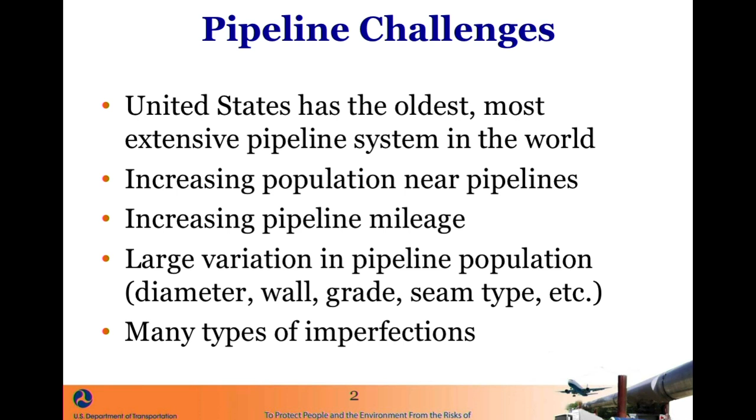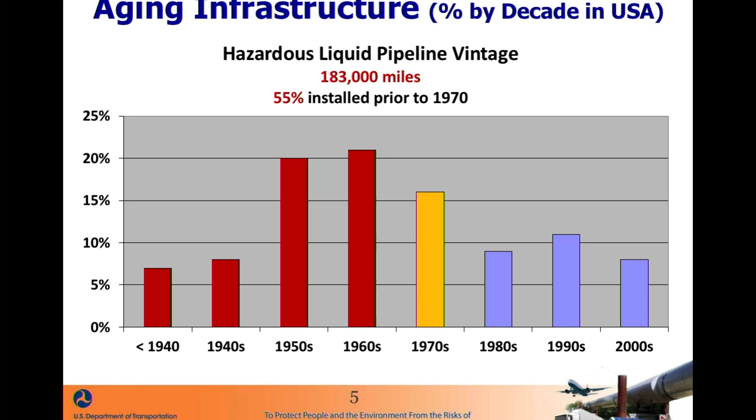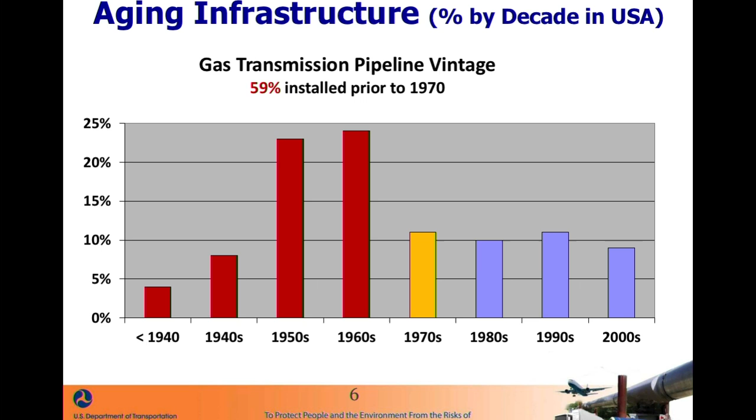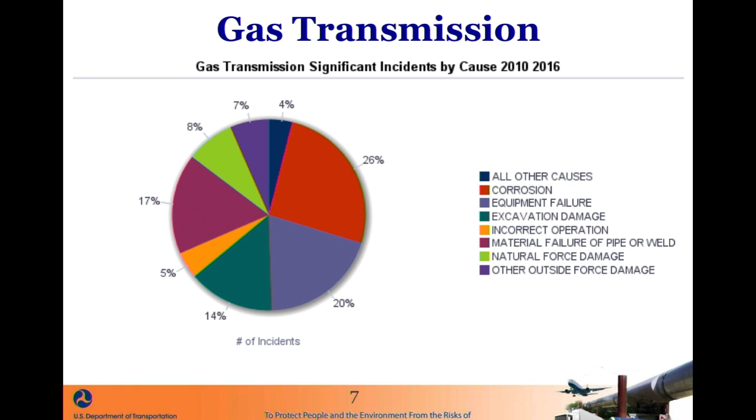And failures may have many causes. This is a pie chart that shows gas transmission significant incident failures. And you can see there's a lot of colors on this pie, and that corresponds to a lot of different types of imperfections that are in the pipe. And similar for hazardous liquid. There are many different causes of hazardous liquid significant incidents here.

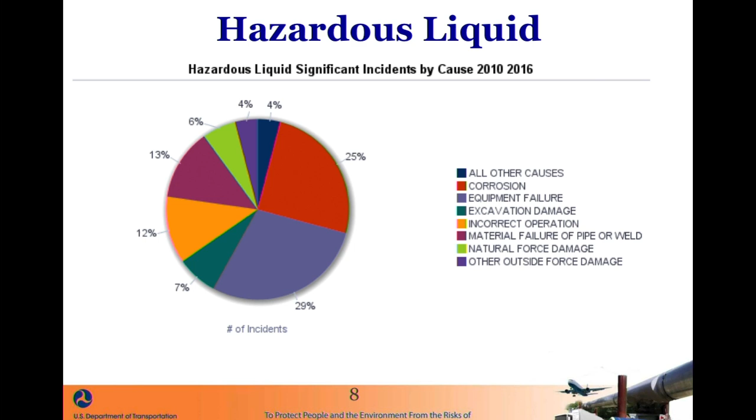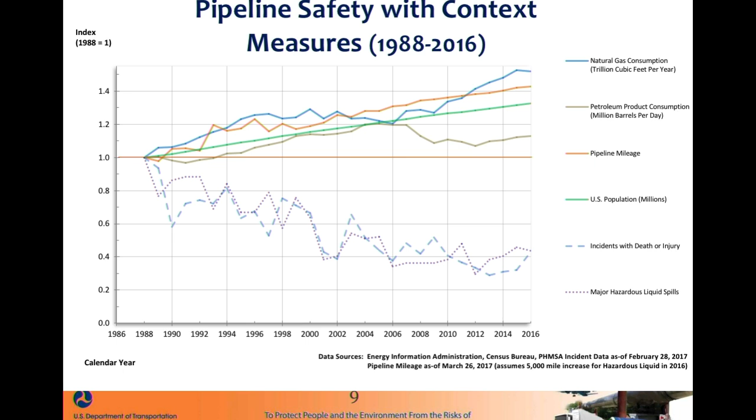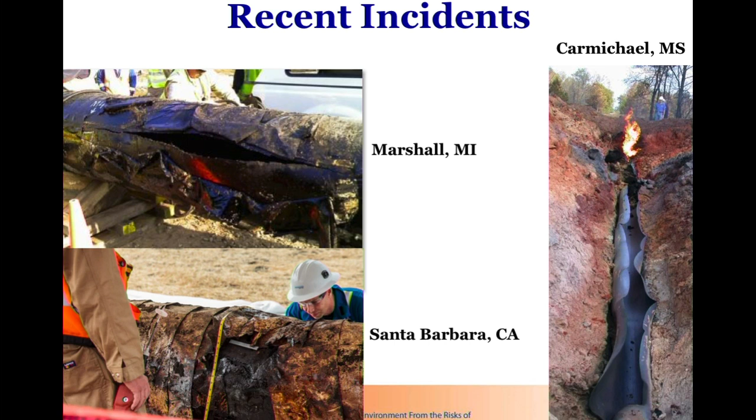This chart shows that the trend on the top shows pipeline miles increasing, but we see a decreasing trend in pipeline incidents. And we think that's mainly due to integrity management, and ILI is a big part of that, trying to find these defects and make repairs before they fail. And so this we feel is a good metric to illustrate. But as Carl says, there have been some high-profile incidents where ILI missed the defect which failed, including Marshall, Michigan, Santa Barbara, and Carmichael, Mississippi.

So in 2007, a propane pipeline failed in Carmichael, Mississippi, where 2 people died, and I've took an excerpt from the NTSB report there, where it says, current inspection and testing programs were not reliable to identify features associated with the long seam ERW failure.

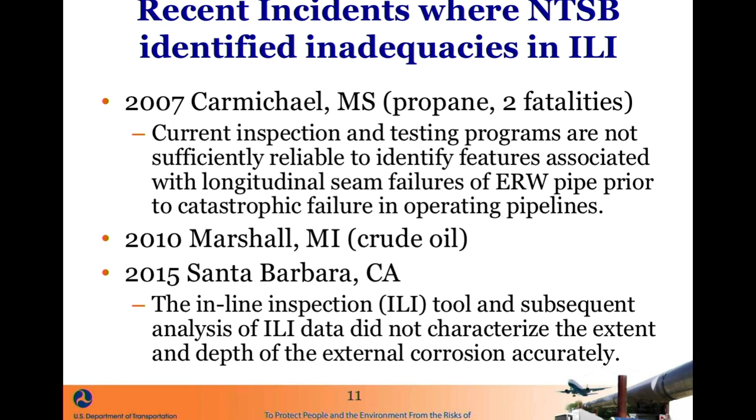So there's also the 2010 Marshall, Michigan, which made significant national news with a significant crude oil spill, and the 2015 Santa Barbara oil spill, where the NTSB says ILI and subsequent analysis of ILI data did not characterize the extent and depth of the external corrosion accurately. So clearly, there's some issues which have been identified with ILI.

And in the 2007 Carmichael report that NTSB wrote, they issued a recommendation to PHMSA. They recommended that we do a study, and that study shall include an assessment of the effectiveness and effects of inline inspection tools, as it applies to electric resistance welded pipe, which is a common type of line pipe which is out there. And this particularly applies to low-frequency ERW pipe made before 1970, which is more suspect to welding seam issues. And so we conducted this study.

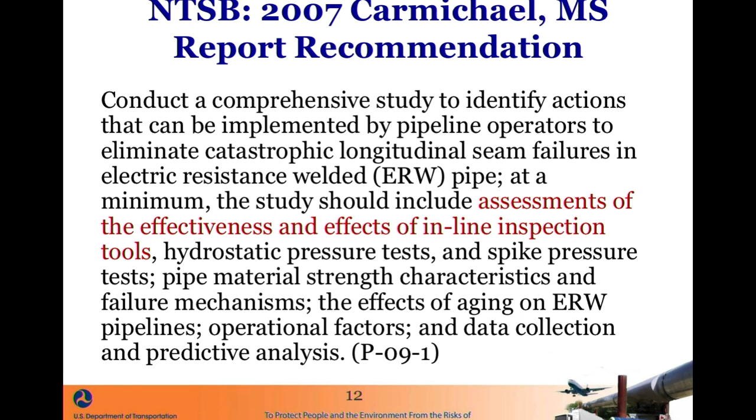It's a 2012 report by Kiefner and Associates and Det Norske Veritas, and it identified significant weaknesses in inline inspection tools, including unreliable defect sizing, accuracy, missed defects, inconsistent failure stress calculations, and that more rigorous verification of tool performance is needed.

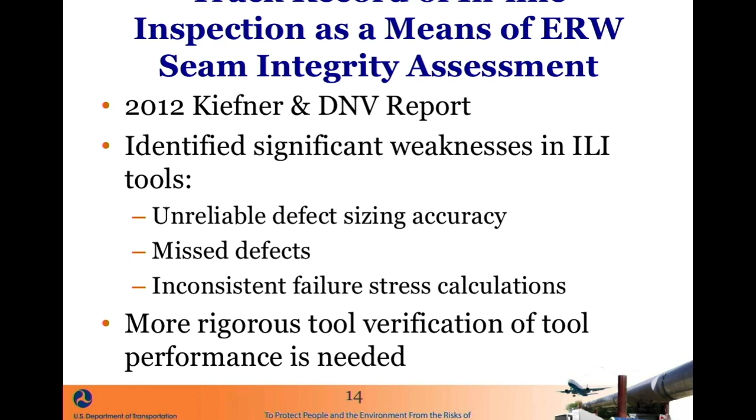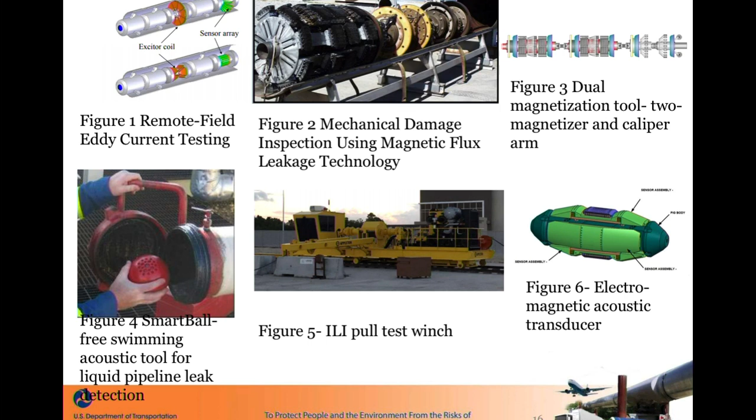And so here are some of the projects that apply to ILI tools. This includes eddy current technologies, magnetic flux tools, EMAT tools, and also an ILI test facility to try to have a standardized method of testing these ILI tools. We feel that's much needed in the industry to try to advance the technologies and to help the industry get better.

So as far as PHMSA regulations, we have comprehensive integrity management regulations, and ILI is an important part of that. And it's in our Part 192 natural gas pipeline code in Subpart O, and under the hazardous liquid code is in 195.452 under integrity management. And our regulations say that you must follow ASME B31.8S for selecting the appropriate tool for the covered segment.

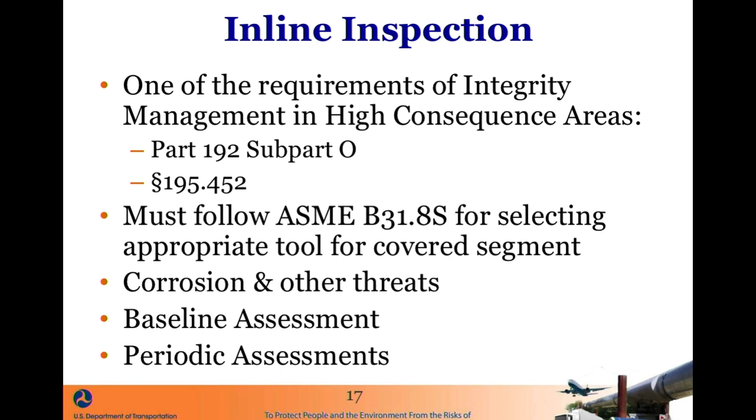These ILI tools are generally used to find corrosion threats and other threats. And they're used to develop your baseline assessment, and then you have to run periodic assessments to see if the defects have grown over time. So, we recognize that no tool is perfect. Each one of these ILI tools is designed to detect a specific imperfection type within a certain size and orientation.

So all these tools, they're not perfect. They will not find every defect that's in the pipe. They don't have 100% accuracy. There's a tolerance associated with every tool, and that has been getting better over the years as the technology improves. And also keep in mind, this is an indirect assessment method.

I think of it as looking at if you see a shadow of a duck, it's probably a duck, but it could be something else. It could be another animal hiding behind the duck. You don't know. So you need to do periodic digs for direct assessments to validate the results. You're looking at shadows. Was it really a duck?

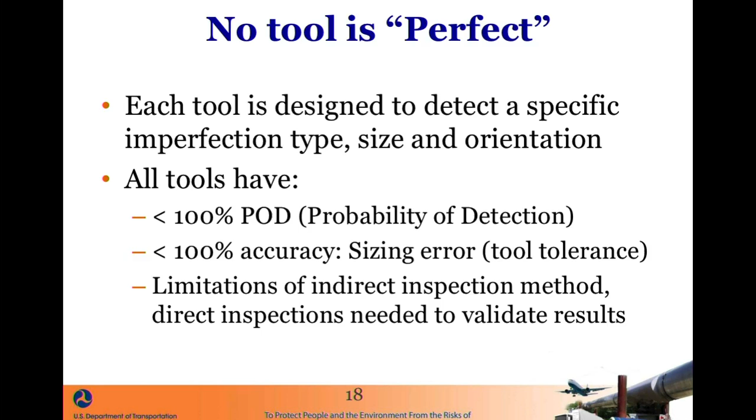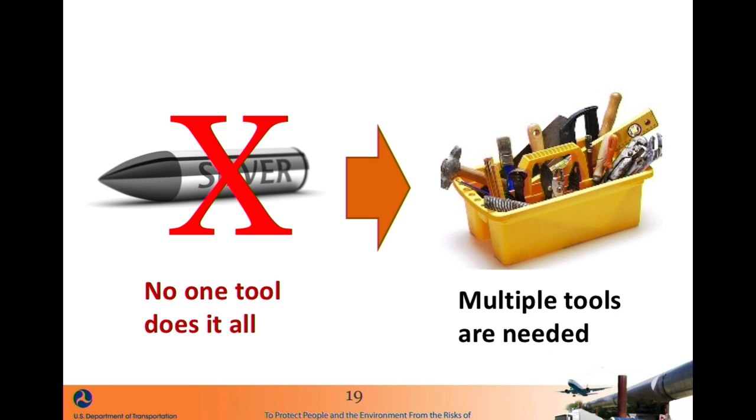So I think one tool does not do it all. It's not a silver bullet, but this should be used as one of the many tools in your integrity management toolbox to safely manage your pipeline. Another way to think of it is that the ILI tool is one layer of defense. You need to have many other layers to assess. Every tool has its strengths and weaknesses, and you need to use complementary tools to see things that that tool may not see.

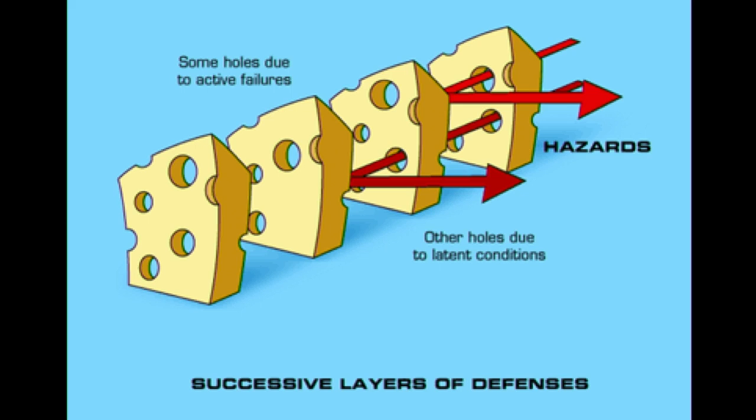So in summary, ILI is an important part of an effective integrity management program. You're much better off running ILI than not. You're much better off getting more information than less information about your pipeline system. It's a very valuable tool. It has seen a lot of improvement over the last few years, and I think everyone feels that it still needs a lot more improvement.

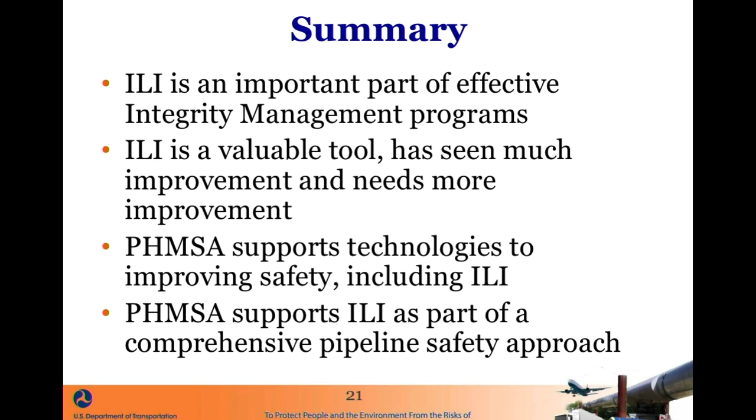We support new technologies to improve pipeline safety, including ILI, and this is illustrated by our strong research program. And like I said, we support ILI as a part of a comprehensive pipeline safety approach. So I don't know if that answers your question, Carl, or smart pig smart enough, but this helps discuss that issue. Probe that at the end.

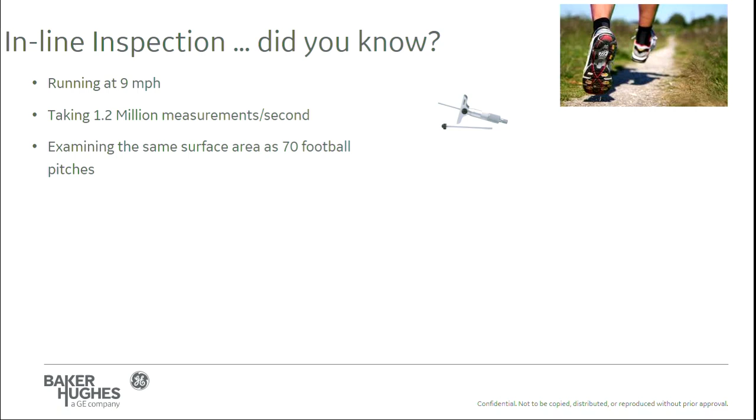It's taking measurements at 9 miles an hour. It's taking 1.2 million measurements a second. That's equivalent to 70 football fields of data being collected at each run. And 100,000 on 20,000 analysis screens. And finding a defect that's the size of a quarter.

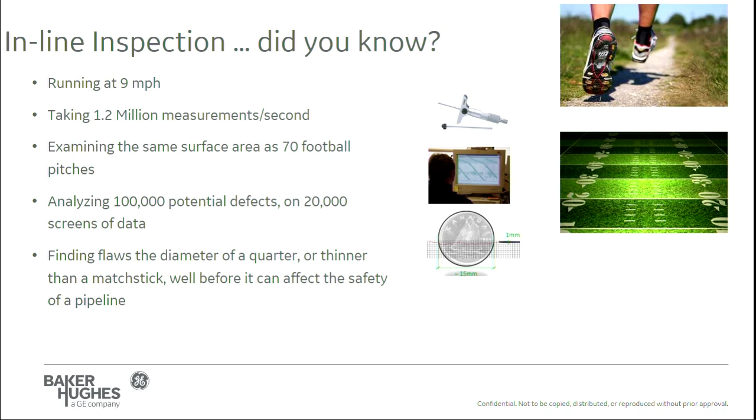And the analogy I like to use is that of a medical imaging tool. Because what you're doing with an inline inspection is exactly what you do when you have your annual or biannual medical to make sure that you're okay. And if you find that you have an issue, then you go for repeated checkups and repeated images to see if that illness has grown.

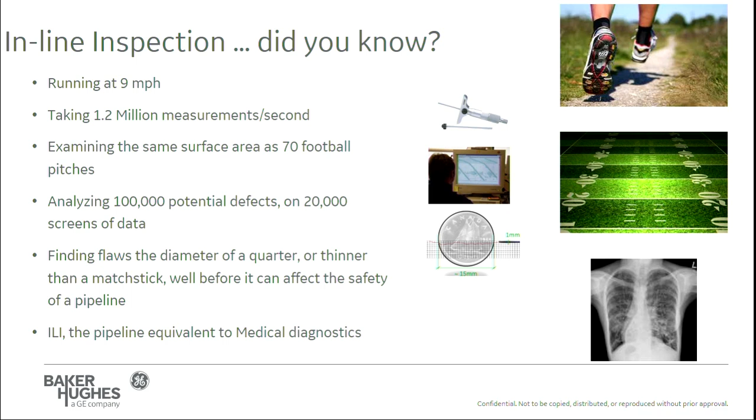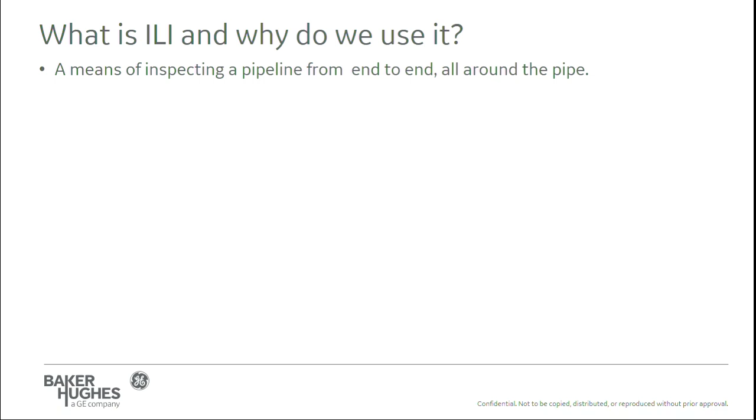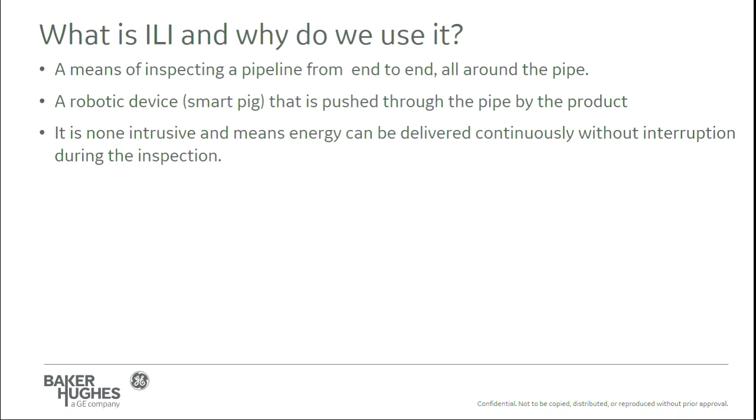So, why do we use inline inspection? It gets all those measurements done from end to end of the complete pipeline, not just a small part of it. It's a robotic device, which unfortunately is called PIGS, that's pushed down the pipeline by the product itself. So it's totally unintrusive. It doesn't affect the flow of the energy. The pipeline still works while it's being measured.

It can identify small flaws way before they become a big threat to the pipeline. Therefore, by repeat inspections, you can actually measure the rate of the flaw growth and therefore plan your maintenance accordingly. It's the most comprehensive means of measuring the pipeline today. It's not perfect, but it is the most comprehensive.

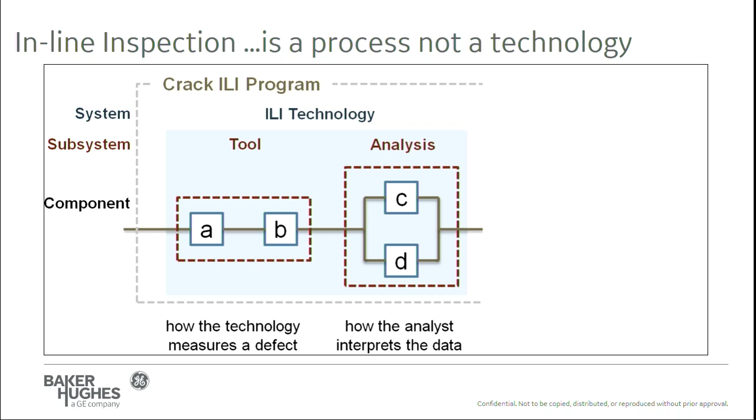So if you look at the system, the crack tool has A and B. A might be a piece of technology, B might be a piece of technology, or it may be a piece of equipment. Analysis: C could be an algorithm, D could be a trained analyst using that algorithm. And then we hand it over to the operators, and they have the pipeline integrity management engineers and the maintenance and repair people who select the digs and do the remedial work. I'm not going to talk about that because Dave Chittick from TransCanada is going to do that for us. So I'm just going to concentrate on the first bit.

And to do that, I thought I would show a small video of a typical MFL tool, just so people understand what a pig does when it's in a pipeline.

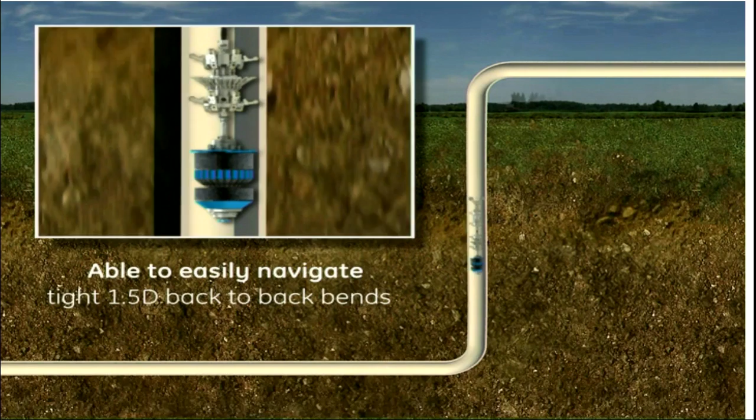These things you see that look like torpedo tubes in a submarine, these are launch and receive traps. This is how we get the pig into the pipeline. The pig has to be flexible. Number 1 rule, never get the pig stuck in the pipeline. Number 2 rule, make sure you get good data.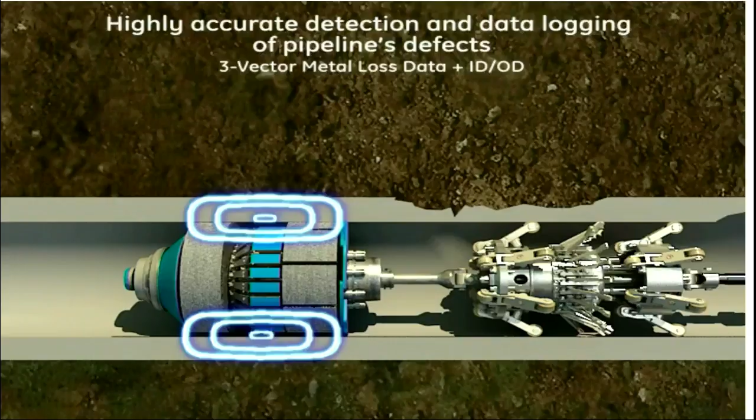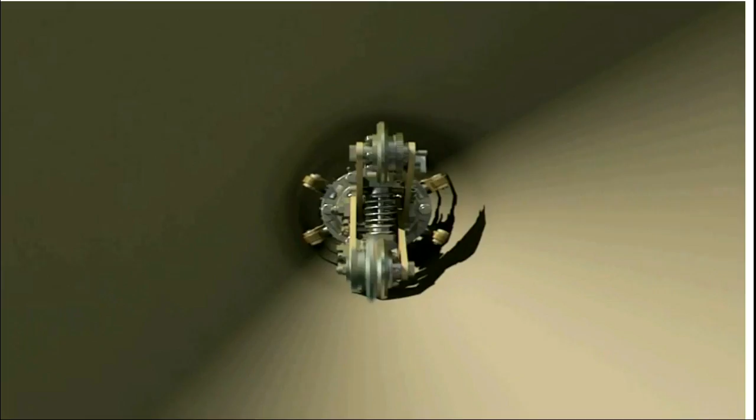So this particular pig uses magnetic flux. You see the blue circuit there going through the pipe. The sensors, the blue sensors in the center, are picking up metal loss and recording it on the tool. On the second module, we can see in the center some caliper fingers, which are actually taking the profile of any dents. The wheels on the back, they tell us where the pig is and how fast it's going, so that we can use it for location later.

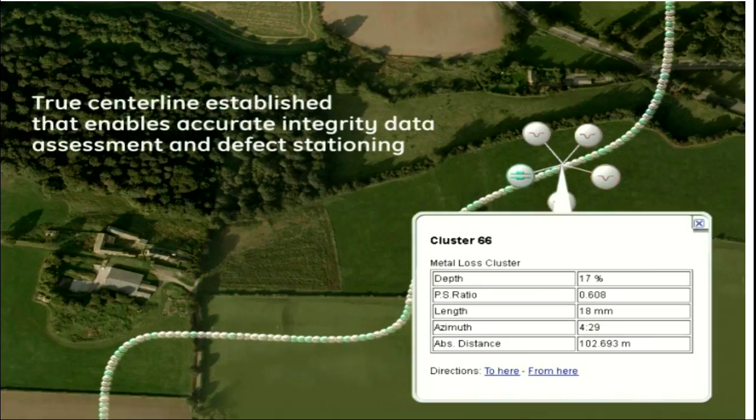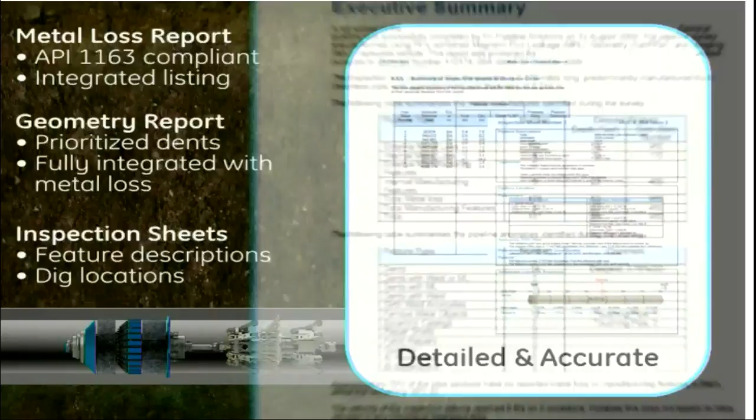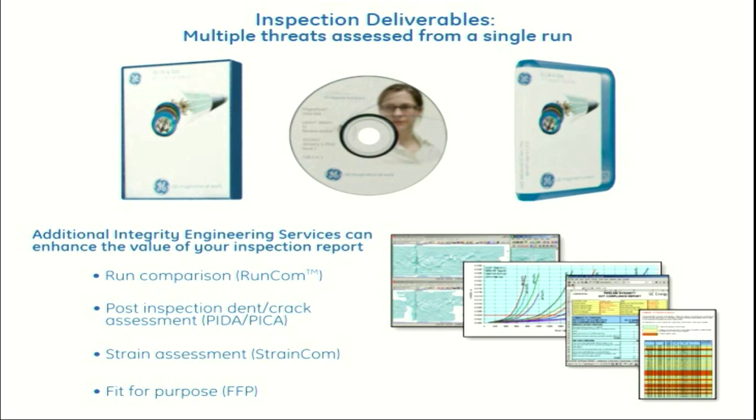On subsequent inspections, if we tell the center line has moved, then we know that the pipeline's under strain, because maybe it's a washout after a hurricane or something. Then we can tell that something's going on there, that the pipeline's actually moved off its center line.

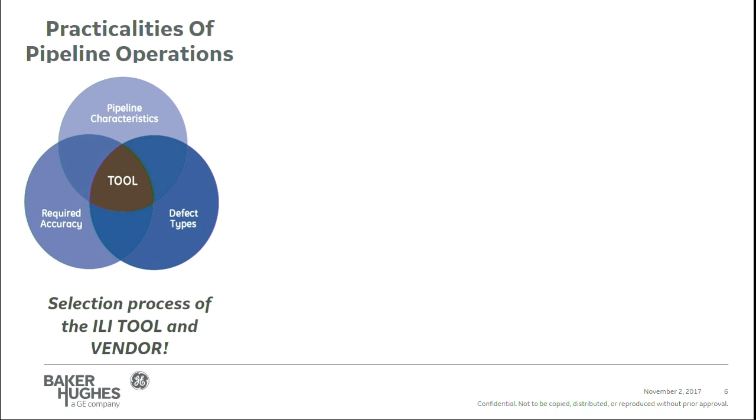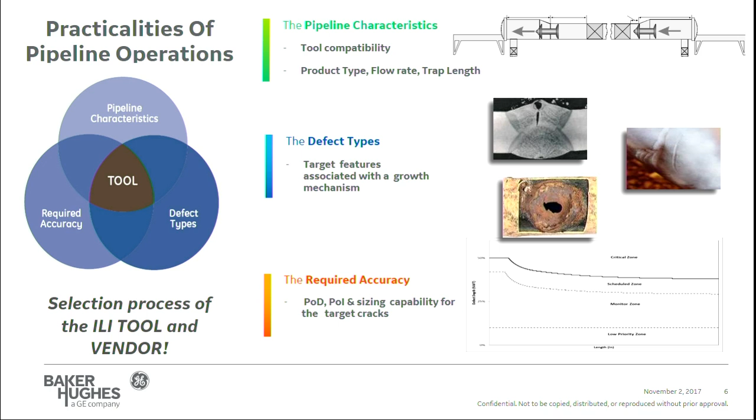So the first part of the process is for the operator to select the right tool and the right vendor. First thing is, not all our tools are the same, and not all vendors are the same. First of all, can you get the pig in the pipeline and out again without it getting stuck? Second, what is the threat I'm looking for? Am I using the right type of tool or tools? And then third one, what degree of accuracy do I want? What's good enough and what's essential?

We had to make that tool after a company in Canada had a failure along a long seam with corrosion. The original tool thought it was a series of pits. When they looked at the failure, it was a groove, what we call these days NAEC, narrow axial external corrosion, and it fooled the original tool's technology into thinking it was a series of pits. When we turned the magnetic field 90 degrees, we saw clearly that it was a groove.

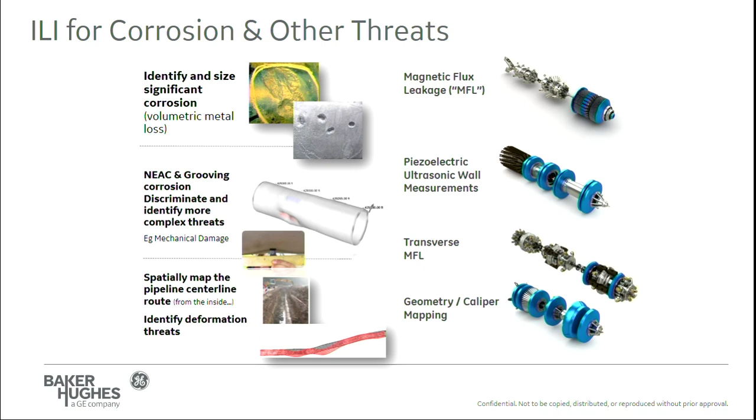So for long seam weld inspection, for corrosion, then what we call the TFI or the CMFL tool is the tool for the job. And then at the end, we've got a geometry tool looking for dents and mapping the pipeline. So this is just one vendor's toolbox of tools, and actually it's just doubled with the acquisition of another company. But it just shows you there's two choices of geometry, high res, low res.

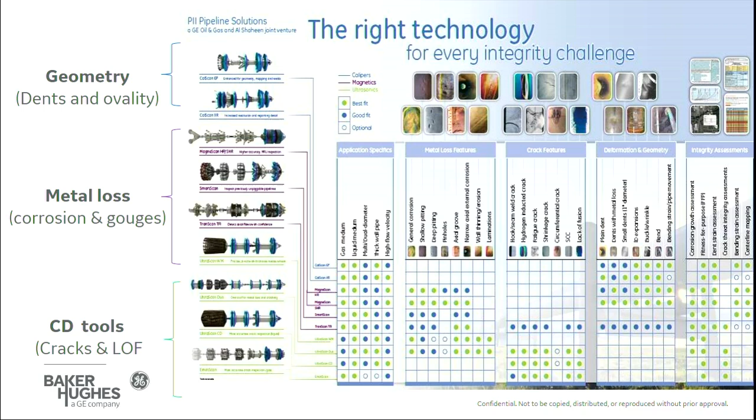There's a number of metal loss tools, circumferential, transverse, or axial, magnetic or ultrasonic. And then you come down to the crack tools, and we have 3 different technologies there: piezoelectric technology, phased array technology, and EMAT, electromagnetic technology. So, just to give us an idea of how this thing's evolved.

So how smart's a smart pig? I started in 1977, this is my 40th anniversary, for a small company in Britain called the British Gas Corporation Engineering Research Station. And we were targeted to find some way of maintaining the integrity of the biggest bomb ever created in Britain's history. 80,000 kilometers of high pressure gas pipeline under everybody's homes in a very small island. So our remit was, it must never ever fail, and you can never ever switch it off. So hydrotest was out. We had to find a means of doing it.

Some smart American guys had been logging pipelines in the US called Linalog and Vetcolog, and we invited them over to a facility that we purposely built in the UK and put some defects in some pipes. And the interesting thing was, it saw all the defects. It couldn't size the defects, but it could see them. So we decided to increase the resolution by 100 times and create the first high-resolution tool. So that was way back in 1975.

1965 was when it all started, and 1975 was when the technology turned into high resolution. And if you go along here, you see things like IMU, that's the inertial mapping unit, that's when you can start mapping pipelines. CMFL, I talked about that in 1997. As we found stuff, it evolved. It got smarter by either changing the technology slightly or learning more about it, or just making it faster, better electronics, better batteries, making it go longer.

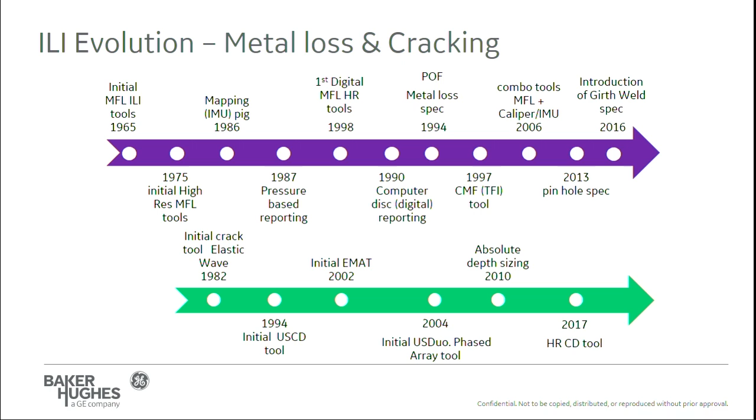And then we started to look at more advanced technologies like phased array, and I'll show you how phased array works in a moment, which allowed us to go from crack detection to crack sizing. And that's when we changed from giving bucketed sizes to absolute depth sizes with a tolerance. That helps the operators tremendously because now they've got a tolerance they can work on for selecting, prioritizing which cracks to go for.

But going back to the point before of teamwork, it's not just the tool. I can go to Radio Shack tomorrow and build you a tool. There's 30 ILI vendors out there now. There were 2 or 3 when I started. But how many are reliable, repeatable, accurate? I was going to say certified, but we're not regulated, to give you the results that you expect. And the way to do that is training and experience.

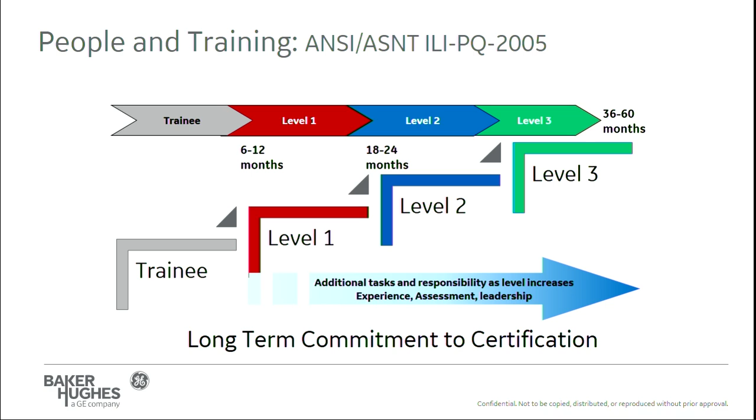When an analyst comes in, he's not allowed to, or she's not allowed to touch real pipeline data for the first 6 months. Then they become a level 1, then a level 2, and then a level 3 is an instructor level. That applies also to field operators, not just the analysis people and project managers. And there's even an ILI PQ 2005 standard, and ILI companies go, do we comply? We already had this and we went, are we compliant? And that is the minimum standard. We go beyond it.

So over the years that we've run crack tools, we have found that there's at least 20 different types of cracks that grow on pipelines. Now, as an industry, we report 2 types, crack fields and crack-like. Crack field, that's SCC. That's pretty easy to tell. There's a whole field of cracks. There's not just one crack, so the tool can see it easily.

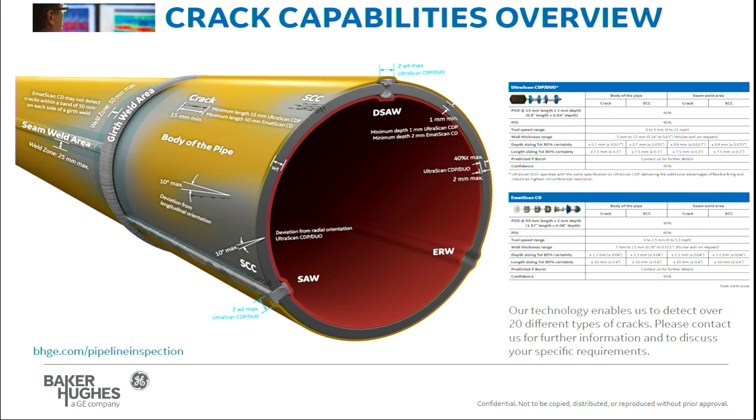On the crack-like, there's crack-like in the body of the pipe, there's crack-like in the long seams. Now, this is a weird pipe because I've got 3 seam welds in it. I've done that on purpose so that you can see the different types of welds and the different types of cracks that these coalesce to. Now, it's very easy to see stuff in the body of the pipe because there's nothing in there to give a reflector back other than the pipe. When you get around the seam weld, that's when it starts to become challenging.

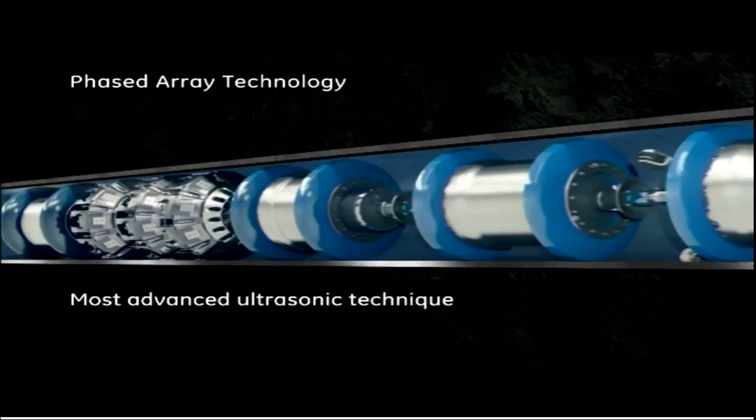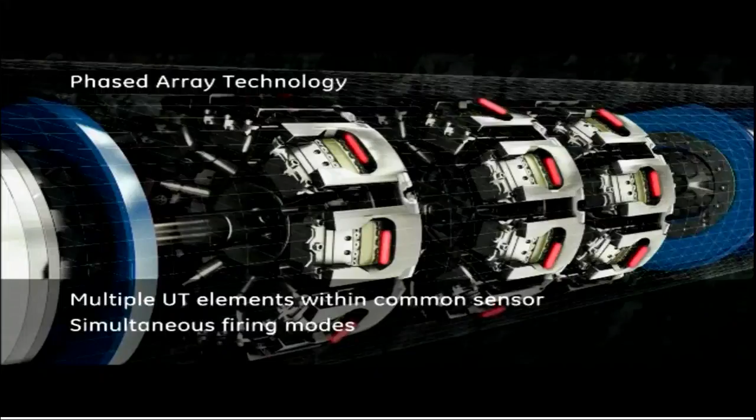So, this is how the CD tool works. This is the phased array tool, but it works similar to the piezoelectric tool, except in this mode, it's doing wall measurement, so it can do 2 missions. You can see that each sensor carrier is slightly offset, so you get full 360 coverage. And this is pitch and catch, where we're throwing sound at 45 degrees at the cracks.

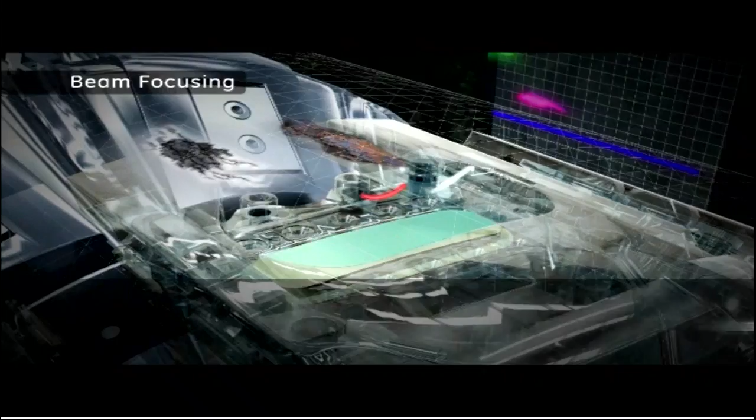So if you look at the evolution of crack tools from way back in the day, what I don't want to focus on is the individual tools on the top. I want to focus on the advances in analysis and the advances in reporting. When we first bought the USCD tool, it took 1 year to get a report. You ran the tool, you did some analysis, the operator did some digs, you did some calibration, you put it back into analysis, and then you gave them the report.

It took 12 months. That would never stand up in US regulations for discovery. So we had to fix that. And we fixed it by using automation, by training algorithms and by training analysis people to be able to do it more efficiently, to the point where we're at 30 days now.

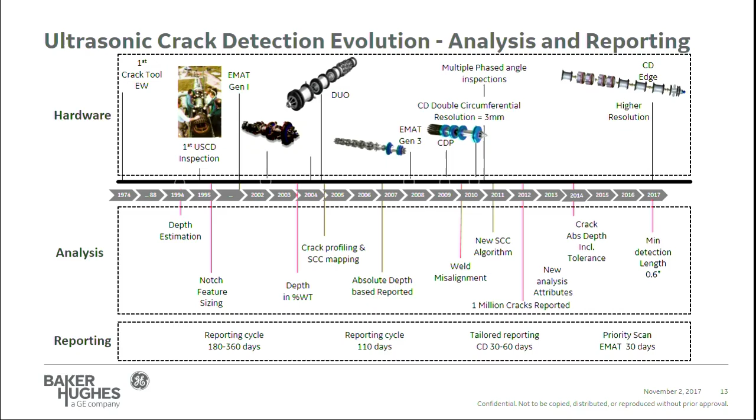So when you dig into these things, the tools worked. We didn't overlay the data on top of each other and see the cracks and the corrosion. We had 2 threats, not 1. That was a big lesson learned for everybody. So the tool didn't get it wrong. It wasn't a miss. All the tools saw them. They just didn't put the data in the same place, or the operator for that matter. But it wasn't thought about at that time.

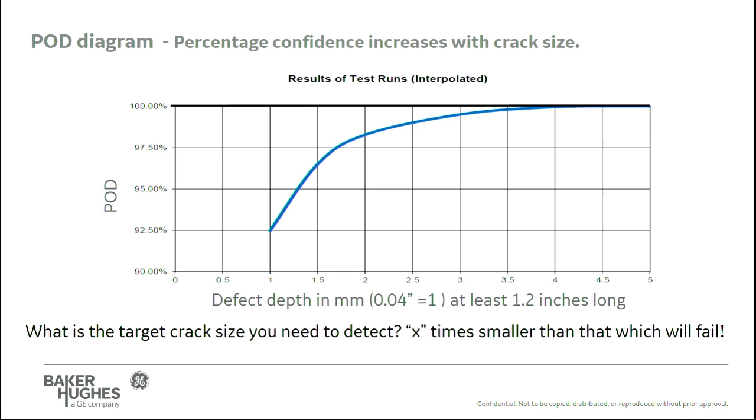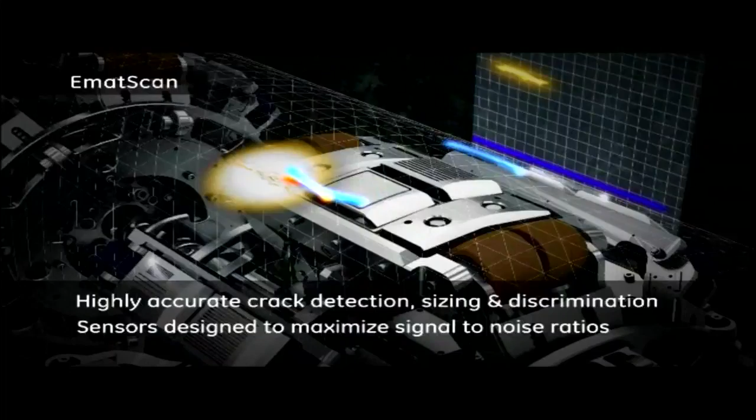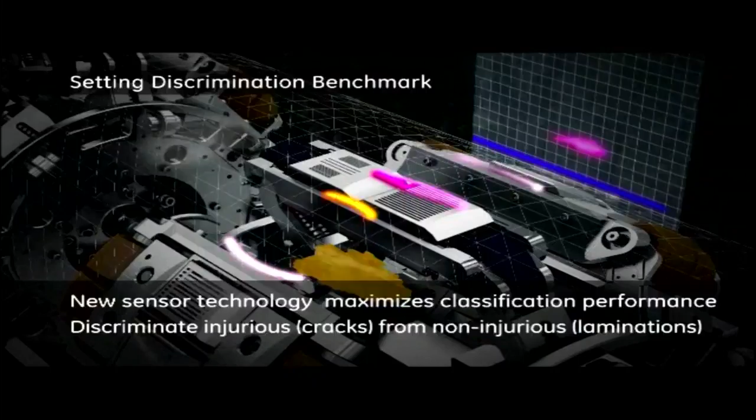So we mentioned EMAT, and we talked about the gas operators, and we've got Dave coming on next. And this is an EMAT tool. EMAT's very different to every other tool I've ever worked with, in that it's a bit like an electric guitar. When you hit the strings and then you've got your pickup and you listen for the sound coming back and it gets amplified. And those blue and yellow sound paths are the sound going around the pipe. The other thing is, the pipe is an integral part of the analysis system. We need to know the pipe, the wall thickness and the coating to make sure that we get a good EMAT inspection.

And we're talking about electric resistance welded pre-1970. There's an EMAT signal, a bonnie red thing on the green, and here's an X-ray along the seam of an ERW pipe that it reported. That crack was 0.16 inches deep.

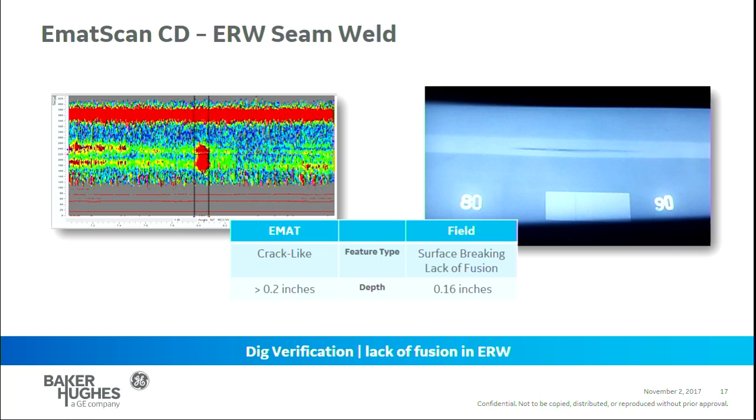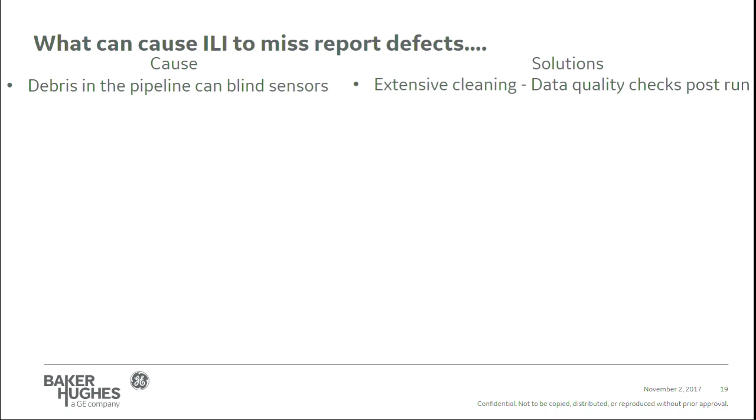So, come here to answer challenges, because Carl's going to be upset about this. We didn't answer the question. So what causes ILI to miss defects, as we call missed defects? First of all, simple, pipeline cleanliness. If a pipeline's not clean, if the sensors are smeared, you're not going to get data. So the pipeline has to be clean. How do we fix it? Extensive cleaning programs, and we have tools these days that we can use to simulate the inspection to tell you the pipeline's clean enough. Because everyone says, when's a pipeline clean enough? It's clean enough when you can inspect it. But you don't know that until you've tried to inspect it. It costs a lot of money if it didn't.

Using the wrong ILI tool for the threat. We talked about Mayflower. They would never find that defect for the tool they ran. And I know because it was ours. But we didn't know what we're looking for. They didn't tell us what we're looking for. Operators need to work with the vendors. It needs to be a collaboration. It needs to be part of the process. What are you looking for? Why are you looking for it? If you're just ticking the box to satisfy the regulator, are you using the right tool? Because box ticking does not work. It's a road to disaster.

Run an ILI tool too fast. There are limits. 9 miles an hour is pretty quick. I'm no sprinter these days. I can't keep up with a pig anymore. But if it goes tearing down a pipeline too fast, you just can't take the data in fast enough. One of the biggest problems in the gas industry here today, on the utilities with low pressure lines, is that pigs run out of control. Even if you can get it in the pipeline, if you can't keep the speed within the limits of the tool, you're going to have a poor inspection.

How do you know you've got a good inspection or not? Post-data checks. So after the pig's run, we have a flight recorder inside the tool, like we have on airplanes. And we look at everything that tool's done during the run, so we know how fast it's gone, and we know how many sensors have worked or have gone off or come back on again. Because it's no good just checking the tool at the end and saying it's all worked. We want to know what happened inside the pipe.

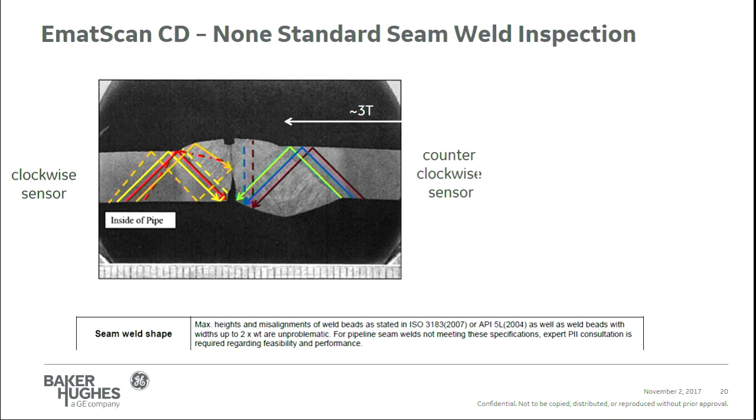So I mentioned a crack and a dent in an EMAT tool, and this is what we're going to run in PRCI. The EMAT tool, because of its crucifix cross formation and the sound going around the yellow path, doesn't know the dent's there. It just reports a crack. We superimpose over the top a super high-res caliper on the MFL4 tool, and we know where the crack is, we know where the dent is, we know the crack's in the dent.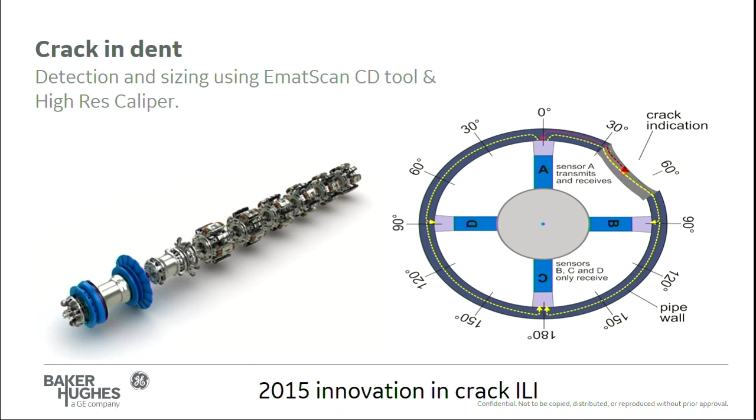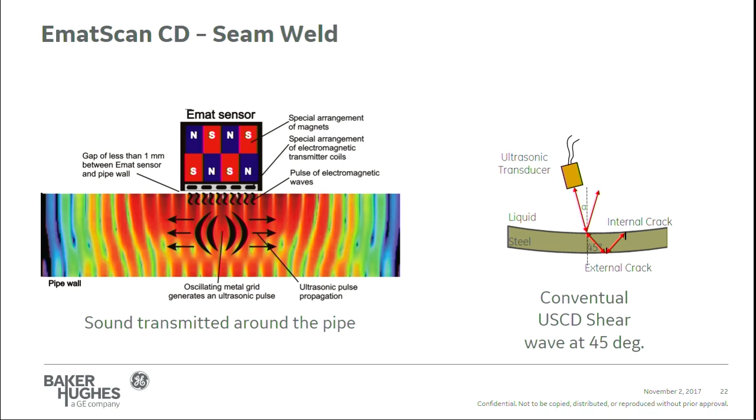And that's because the EMAT goes around the pipe and not bouncing around at 45 degrees. And that's what makes it unique. Now, we're talking about strengths and weaknesses. Why don't we run EMAT on everything? It has weaknesses. It's not as accurate as the CD tool is in real cracks on standard pipe, which is what it was designed to work in.

So what we're going to do to fix it, how we're going to make pigs even smarter. So this is what's on the table right now. It's being sponsored by another company, a client of ours. And that's to look for the next generation of phased array tool. So the tool hits things and sees things. We're pretty confident we can get the POD right, and we can also use multiple technologies to confirm the PODs right, not just the one tool and the one technology.

But those 19 crack-like features, how do we tell operators what those 19 crack-like features are? Because some of those 19 cracks are not injurious, have been there since the pipeline was built, and there's no mechanism to make it grow. So they could spend an awful lot of money digging it up just to note that. And then on the next inspection, see nothing's changed. That's one way of doing it. But wouldn't it be better if we could get three-dimensional imaging?

Now we'll go back to my medical analogy. I work for General Electric Company. We make MRI machines. We have the software to produce that image. But I have to go back down the pipeline between 5 and 9 miles an hour and do it in one hit with multiple sensors. So I've got to derive a sensor that's going to do that to produce that image in that time frame and in a hostile environment.

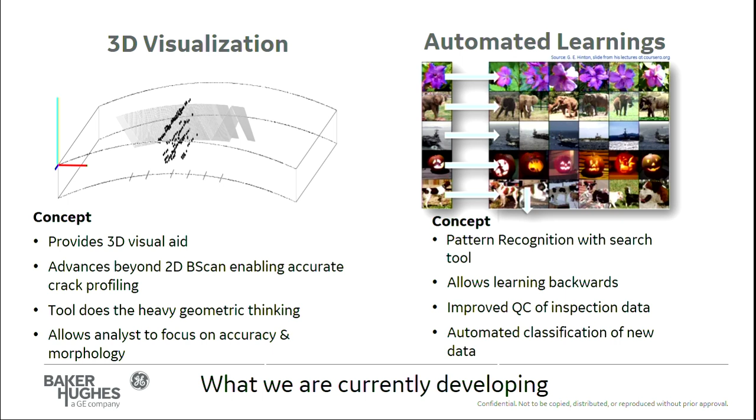When I get all that information, I don't want to go back to a one-year reporting timescale, so I have to develop automated learning. We also supply the FBI with facial recognition software. So if we use that software and that software, all we're missing is the sensor, and we're developing the sensor right now with GIT. So we believe within 3 to 5 years, that will be a reality. Then we'll be able to tell people exactly what's going on inside the pipeline with that technology.

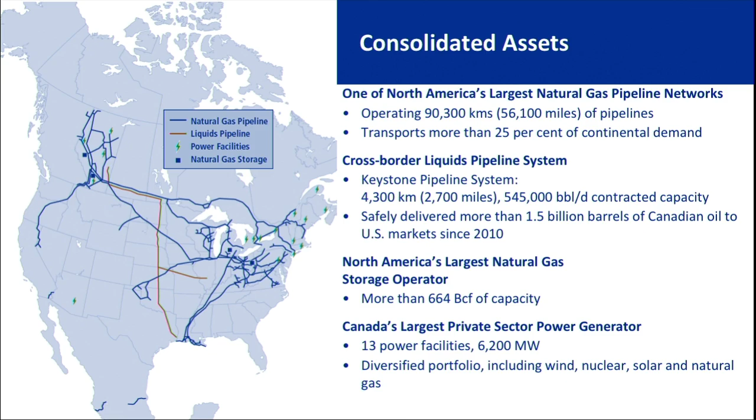We'll start with external corrosion. We talk a lot about external corrosion. It has always been one of the predominant threats that we're concerned about. I mean, typically, Steve talked earlier today, the first line of defense is your wall thickness. I always think of the first line of defense as the coating system, but it is the wall thickness. I mean, the more steel you have in the pipe, the more capacity you have for the corrosion to happen.

But, historically, the pipes were coated in the ditch with a coal tar or an asphalt type coating system, and we evolved from that into polyethylene tape, now on to fusion bond epoxy, and we've been using fusion bond epoxy now since the early 80s, and fusion bond epoxy really has proven to be an effective coating system, and all new pipes now pretty much have that coating system.

Next up, the next line of defense is the cathodic protection system. Corrosion is an electrochemical process. We impress a current along the pipeline system to impede the potential for corrosion. And so along the system, we've got rectifiers and anode beds up and down the right-of-way. And early approaches to managing corrosion were really focused on maintaining the electrical potential on the pipeline system.

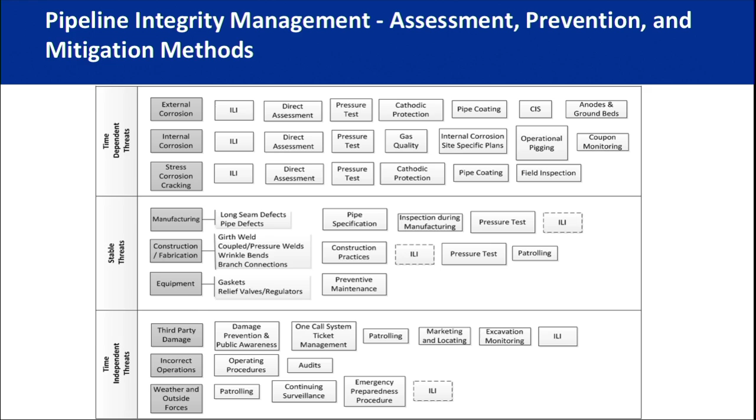But I'm going to have a slide here, just to talk briefly about technology development. So, in this space of furthering ILI technologies, the ILI market is quite competitive. Jeff mentioned there's 30 vendors, and I'm sure every one of them is out there trying to build a better tool, a better technology, and there's quite a lot of opportunity there. A lot of research goes on.

There's industry-funded research, like with the Pipeline Research Council. A lot of operators are members of the Pipeline Research Council. We all pay a subscription fee to PRCI, and that money's pooled together to undertake a number of projects. One recent development at PRCI, specific to ILI, is the development of this technology development center in Houston.

And in this facility, there's test loops, all sorts of pipe samples, pull rigs. We can run the different technologies to prove out how these technologies perform. Build a loop with different types of features within the pipeline. Quite a development, and it's getting a fair bit of use.

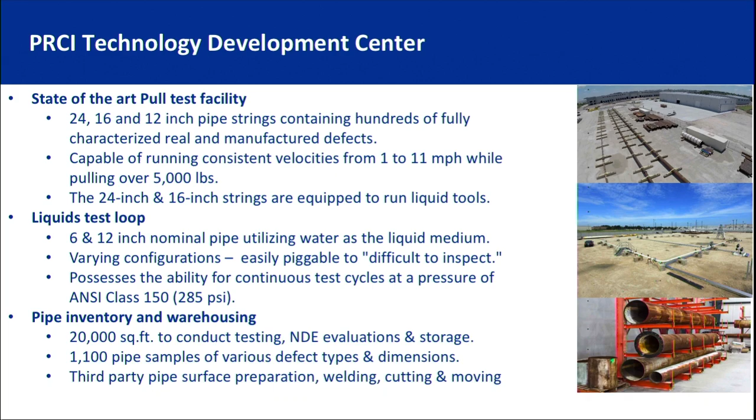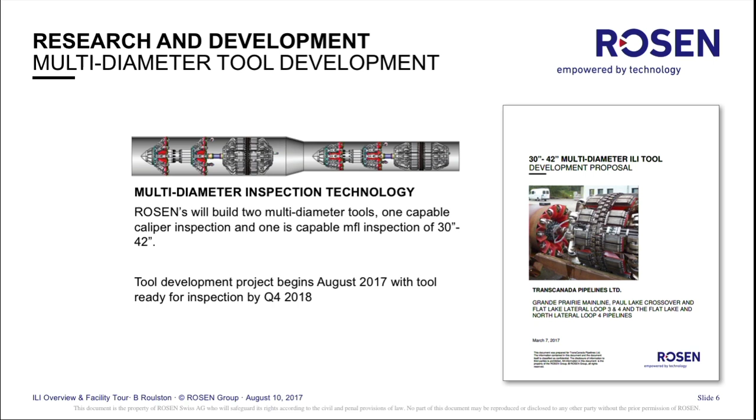Well, I got a couple slides here. We've seen a good number of slides from GE and Baker Hughes. There are a few other operators out there. Rosen's got very involved with research and development. They've got an innovation center in Germany, a lot of engineers and scientists over there, focusing on areas like multi-diameter tools and combination tools, putting multiple technologies together onto one tool.

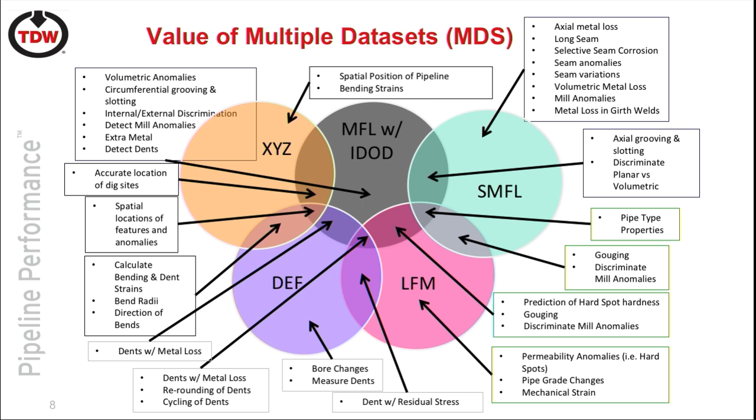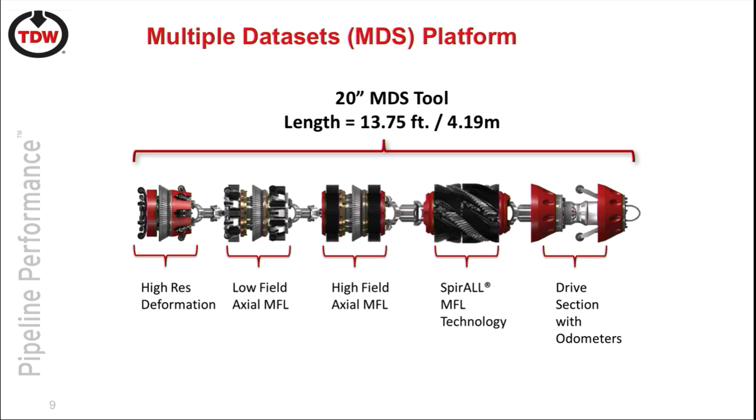TDW is another vendor. This slide illustrates the different technologies, really focusing on the overlap of the technologies and how we're benefiting from that overlap to identify gouging, cracks, and stuff like that. Same here, different technologies all on one pig. That's a caliper, a low field MFL, a high field MFL, and a SpirALL MFL, four different technologies all on one inspection.

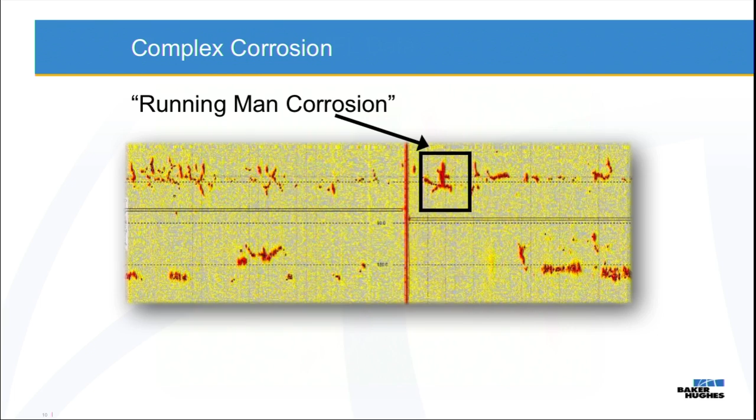But this is a slide that's been around for a little bit. I like this. Thought I would share this with you. It's called the Running Man. This actually was a TransCanada pipeline with a Baker Hughes inspection, and that's the signal that the ILI data analyst sees. There it is there.

Does kind of look like Jeff. He was saying he used to be a runner, but he doesn't run as fast as the pig anymore. I think that could have been Jeff.

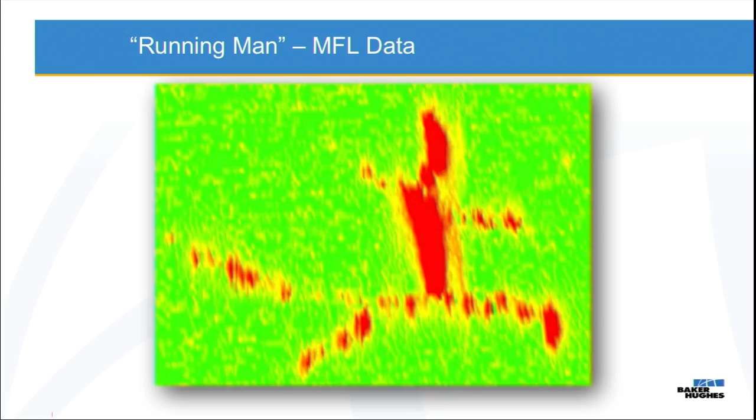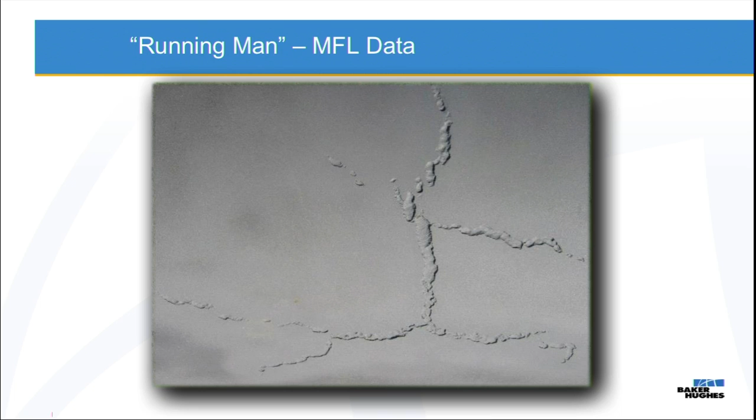There's the excavation, coating's still on. That's what it's looking like with the coating on. That's what it looks like after we've cleaned up the pipe. That's what the laser scan of it showed, and put them all together. So, kind of a good story there.

But to wrap it up here, we talked about the important role that ILI is playing in managing the threats to our pipelines, and how technology has improved and how it will continue to improve. We talked about how it is a process. There are standards, there are regulations, there are processes to qualify tools, processes to verify, to calibrate. It is a process. It's not just tick the box.

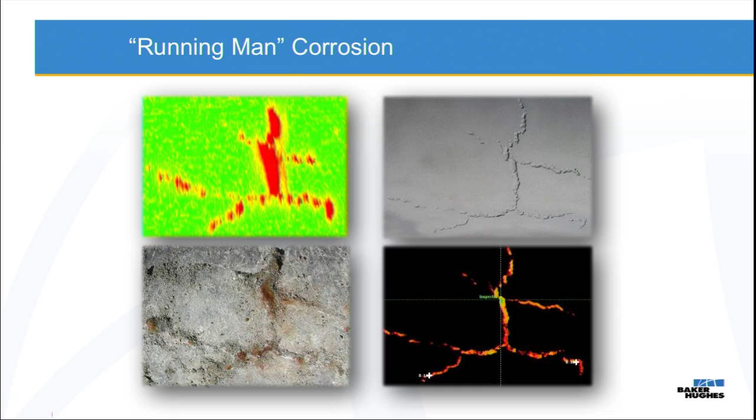So are tools smart enough? I think the ILI tools are smart. Today we've improved and found ways to benefit from the tools. The tools are getting smarter and smarter. I take great comfort in understanding how advancements in tools are going to help improve the job we have of managing the integrity of our systems. So that's it.

So we have time for some questions. Any questions? Let's start over there. First, I don't want to monopolize. I got a hard question to ask. So, if you want to take it, I'll be happy to lay it out on you.

I've come to this from the outside. I'm an inside the fence guy. A lot of pipe, but all inside the fence, and ILI isn't part of my world. So I came to this and looked at the data, and I get quite confused. I wrote a paper last spring that I presented at the NACE conference on modeling pitting corrosion based on a suggestion John Kiefner made.

What was interesting that I found is when I went looking for data to calibrate my model in the open literature based on ILI through the life cycle of a pipeline, there is just one good data set in the open literature, and it comes from Pemex. It comes through the University of Mexico, and Francisco Caleyo and Alma Valor have done some beautiful academic work on that data set. It's about beat to death.

I am very interested in getting more data into the public literature so that the general community can form some kind of an impression about what this technology can really do. There are all kinds of claims made. I'm sure within the industry you share a lot of information, but at least in the U.S., the academic community has very, very little to work with. And they're the ones that build your credibility over the long time.